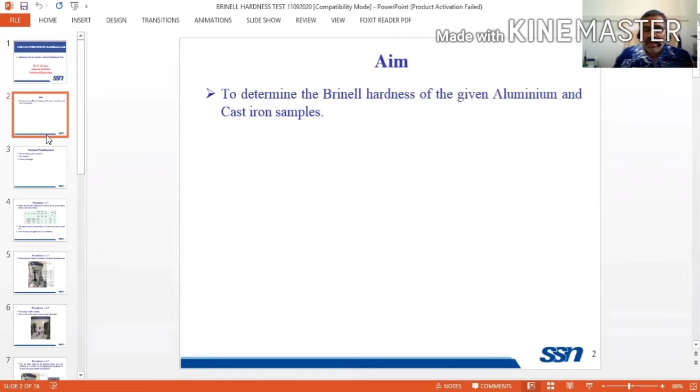This is a Brinell hardness test. The aim of this experiment is to determine the Brinell hardness number of given aluminum and cast iron samples. Tools required are Brinell hardness testing machine, ball indenter, and Brinell microscope.

So procedure, there are 7 steps in the procedure. The first step is we have to fix the load and duration of application of the load. Here 4 different metals are given. The first metal we are going to use is ferrous. For ferrous, the corresponding load is 3000 kg and the time of load is 15 seconds.

Again, we are going to use aluminum. For aluminum the load is 1000 kg and the time is 15 seconds. So for steel we use 3000 kg, 15 seconds, and aluminum 1000 kg and 15 seconds. This is a standard value. Next,

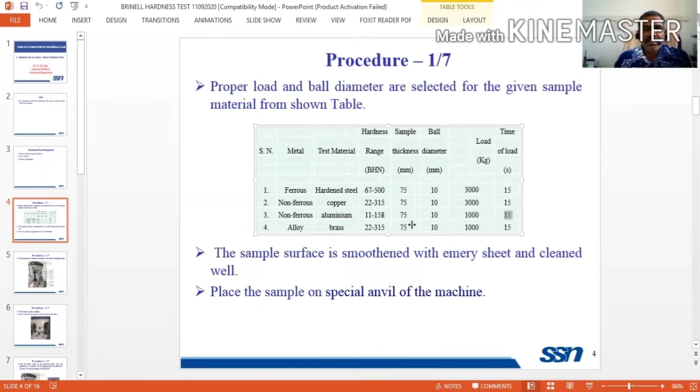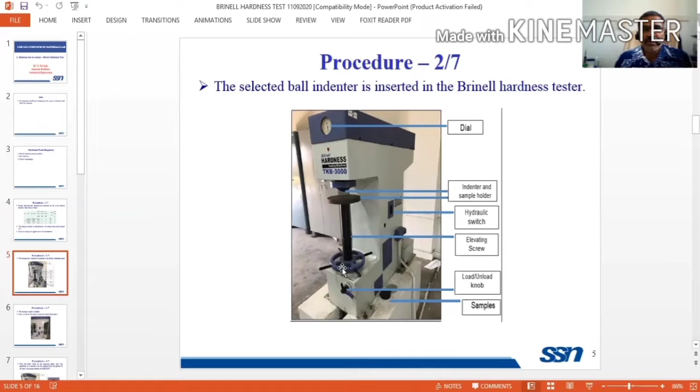Here we have the loading unloading knob. When you rotate it clockwise, the load will be applied on the workpiece by the indenter, and if you unload it, it will be removed. Next, you have to select the weight. Already I told you how much weight is to be applied. This is where you apply the load. For aluminum you apply 1000 kg, and for steel 3000 kg. After that you press this button, then load will be applied. It's a hydraulic system.

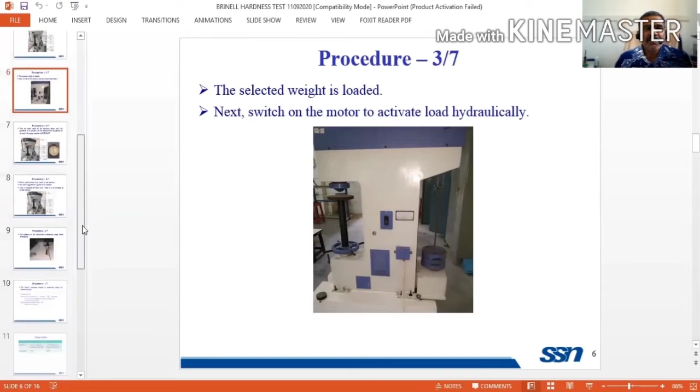Here is where we fix the workpiece. By rotating the wheel, the screw moves upward, and the workpiece comes in contact with the indenter. Once the indenter has initial contact, see, there is a big dial, inside there is a small dial, and an indicator. When the initial setting is over, that can be confirmed by the indicator reaching the red spot. Then the initial setting is over.

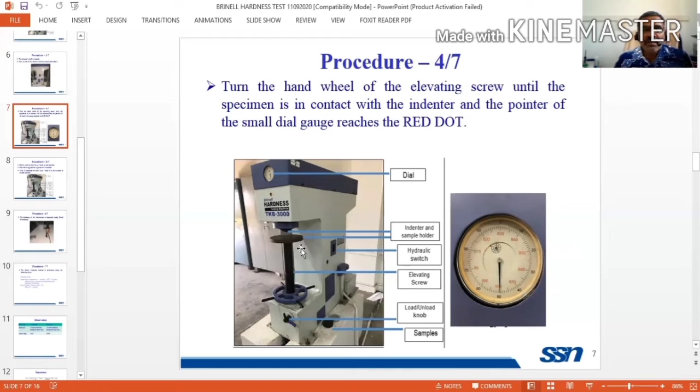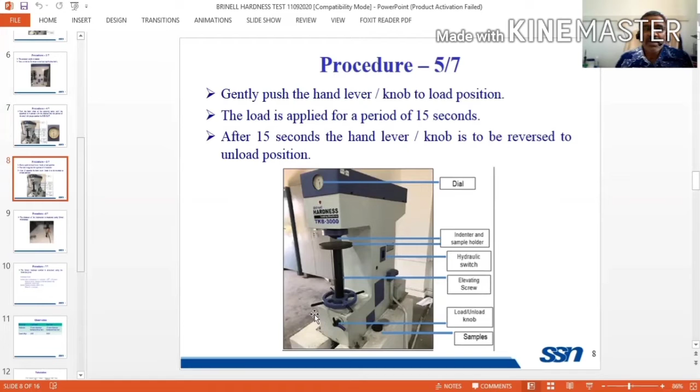After that, we have to apply the load. This is the loading knob. Rotate it clockwise, load will be applied, and wait for 15 seconds. After 15 seconds, remove the load. After the load is removed, take the workpiece to the Brinell microscope. Its purpose is to measure the diameter of the indentation. We already know the diameter of the indenter, it is 10 mm. Now you find the diameter of the indentation using this microscope.

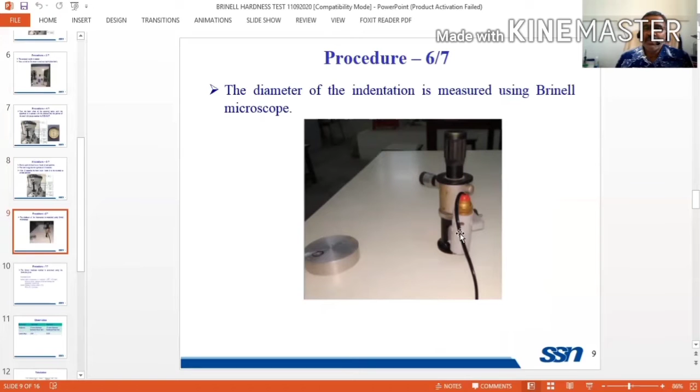After that, you have to do the calculation. This is the area of indentation, which can be calculated using this equation. Here, capital D is the diameter of the indenter, 10 millimeters. Small d is the diameter of the indentation, which you measure from the microscope. Substitute all the values in millimeters. Similarly, substitute the load in kg.

So Brinell hardness number is load divided by area. Area in millimeters, load in kg. It will give you a number. It doesn't have any unit. It is the Brinell hardness number, which gives the indication of hardness.

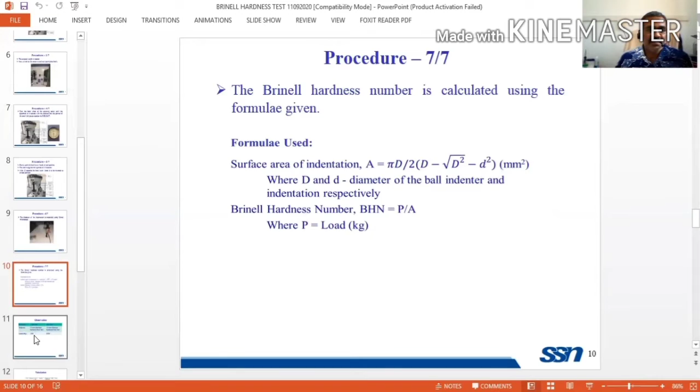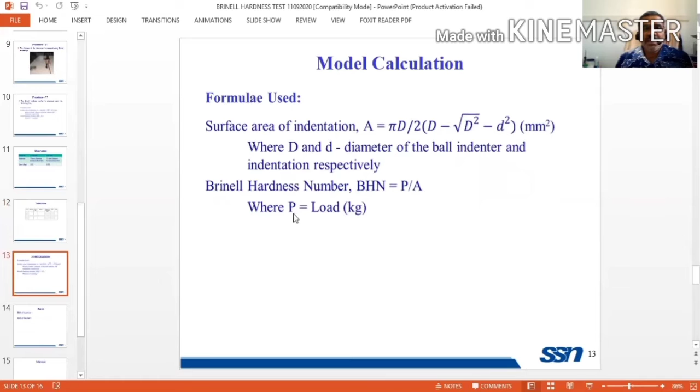You enter the diameter, then you enter the hardness value, which you get from the calculation. Then you have to write the mean. We have taken only one reading, so you write that reading. So this is the equation for calculation.

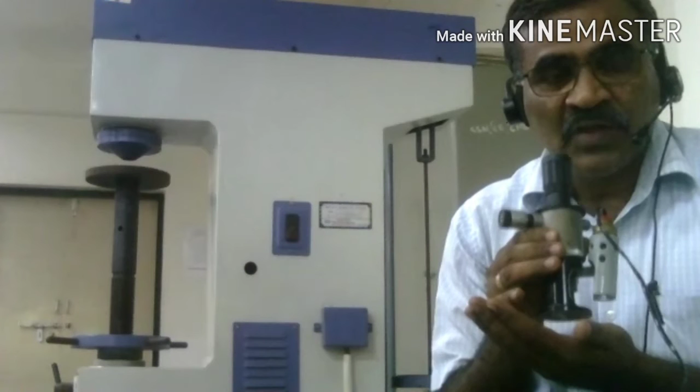We have a microscope, a small microscope. This is used to find the diameter of the indentation. You keep the workpiece here, and you can view from the top, and that will give the dimension of the indentation. So now we have the dimension of the indentation and the dimension of the indenter. By using these two, you will be able to find the hardness. So this is the procedure.

The procedure is almost similar to the Rockwell hardness. But in the Rockwell hardness, the reading is directly given, but here we are measuring the diameters, and using the diameter we calculate the hardness. That is the only difference. The value may be different; it has another scale. So if you want to compare the hardness of different materials, you have to use the same scale. Rockwell and Brinell cannot be compared. If you want to compare, take the Brinell hardness for all materials. Now let us see how to do the experiment.

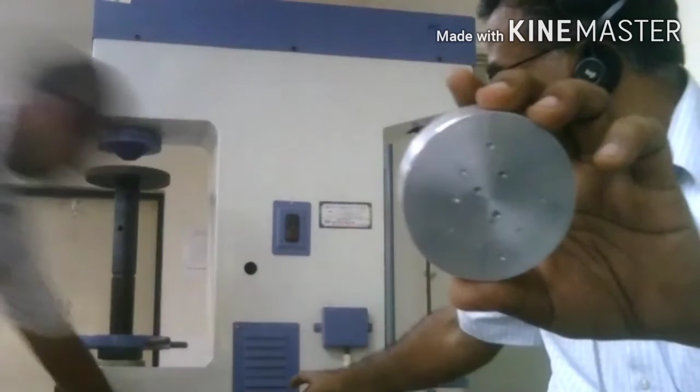So as we saw earlier, this is the aluminum piece, and this is a steel piece. Now we are going to conduct the experiment on the aluminum piece as well as the steel piece. First aluminum. Here the loading conditions are different. We are going to use the same indenter for the two different materials, and the loading condition is different.

For aluminum, we are going to use 1000 kg. Here you have to apply the load. In case of steel, we are going to apply 3000 kg. In the previous case, it was 100 and 150, but the indenters were different. Here, same indenter, but the loading condition is different. For aluminum, it is 1000. For steel, it is 3000. So you have to follow the procedure.

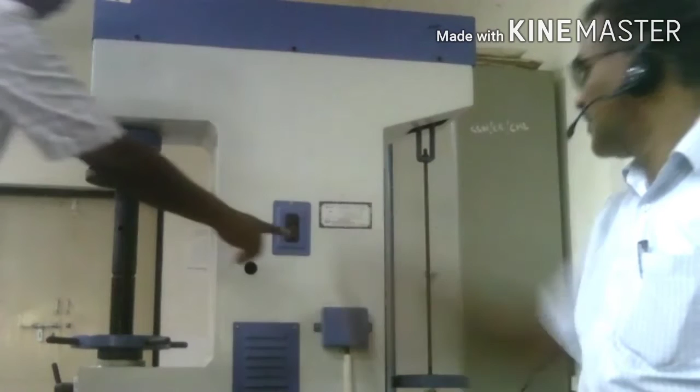Now here, sorry, 500 kg is already there. Now 250 kg we are going to put. This is 250 kg. So now 500 plus 250, it is 750. One more 250 kg. So now totally 1000 kg. This is for aluminum.

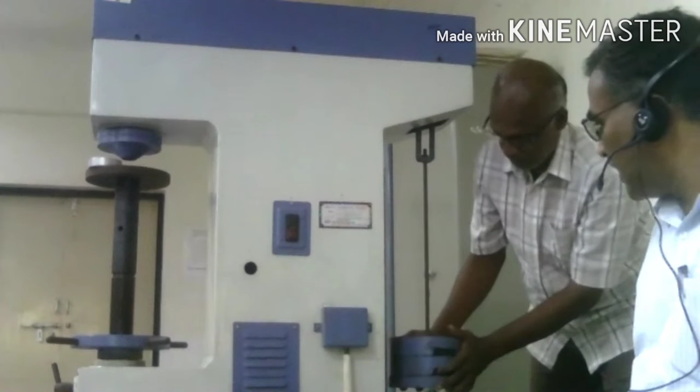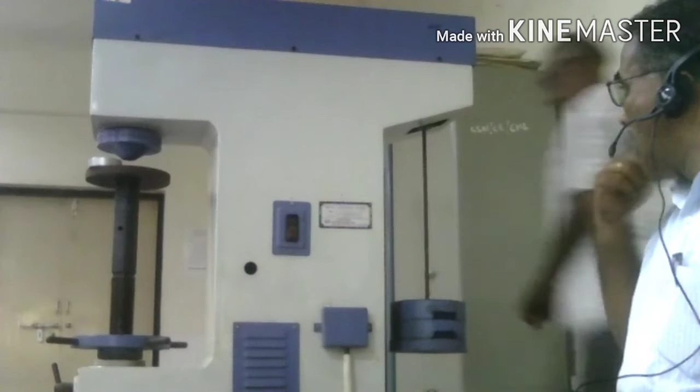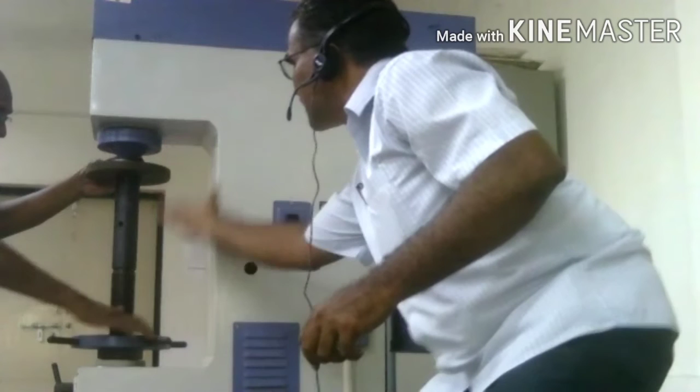This is operated by hydraulics, so you have to switch on the hydraulic mode. Now the hydraulic is on. Now he is fixing the specimen. As you rotate the wheel, the specimen goes upward. He is selecting a place where there is no indentation.

Now it is just touching it. You have to give the minor load; that is the initial setting. When he rotates the wheel, slowly it will go up. At the same time there is a dial. The dial has to show 0. Till then you rotate it.

Is it okay? Okay. Now it is 0. So he was rotating the wheel. If you rotate the wheel, the workpiece is going against the indenter. A minor load is acting. At that position, the indicator is showing 0. So initial setting is over now. Minor load is applied.

Now we have to apply the load. In the previous case, in the Rockwell hardness test, we applied the load slowly. There is no time. But here there is a time setting. Load has to be applied only 15 seconds. You switch on the timer, apply the load, and exactly at 15 seconds you stop it. You unload it.

Now he is going to apply the load. Now he is applying the load, and is seeing the time. 1, 2, 3, 4, 5, 6, 7, 8, 9, 10, 11, 12, 13, 14, 15. Time is over. Now it is unloaded. Now you can release. Now the experiment is over.

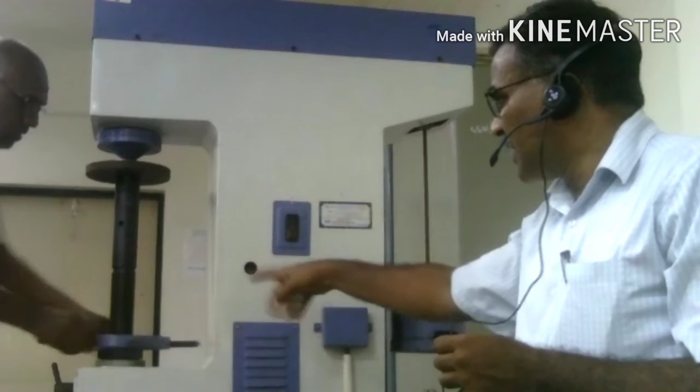Now he is releasing it, rotating the wheel in the opposite direction. The specimen is coming down. Now he is taking the specimen. Now you can see this is an indentation. There's a circle. Inside the circle, the indentation is formed. Now, what you have to do? In the microscope, you have to find the diameter. So this is a microscope. You keep the microscope on the workpiece and find the dimension.

Now sir will measure the dimension and tell. Now he is finding the diameter of the indentation, 3.6 millimeter. The diameter of the indentation is 3.6 millimeter. That can be measured using a small microscope. Already we know the diameter of the indenter is 10 millimeter. The 10 mm indenter is used to produce indentation. The 15-second time was given for loading.

So using these two diameters, you will be able to find the hardness: diameter of the indentation and diameter of the indenter. That will give the hardness. There is an equation. You can refer to it.

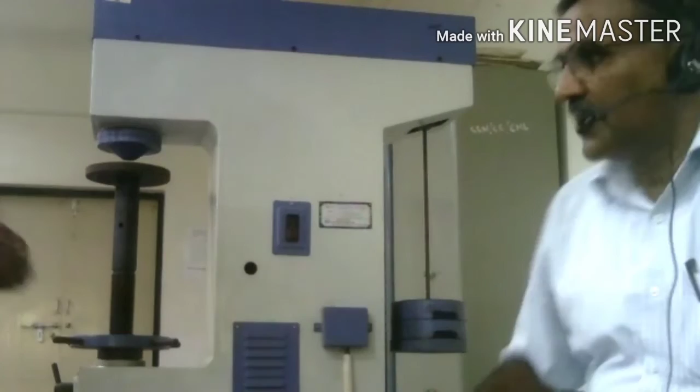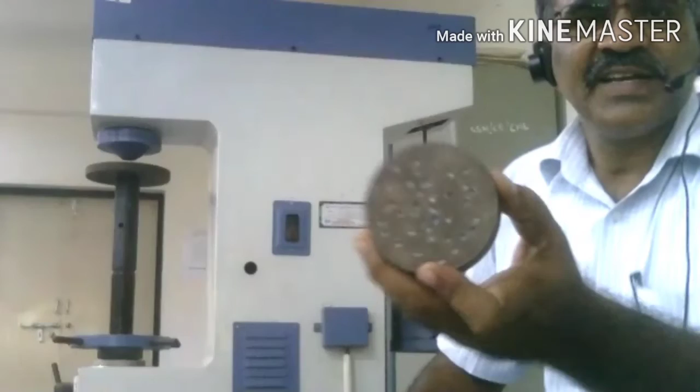Now we are going to test the cast iron specimen. You already have seen the cast iron specimen. Lot of indentations are there. You have to select another place where indentation is not there. So now he's going to apply the load. Already how much load is applied? 1000 kg is there.

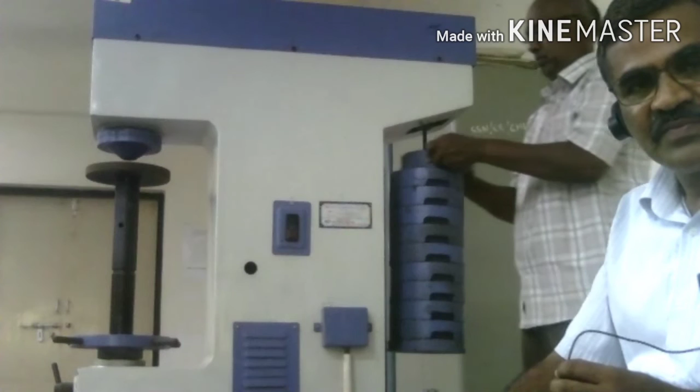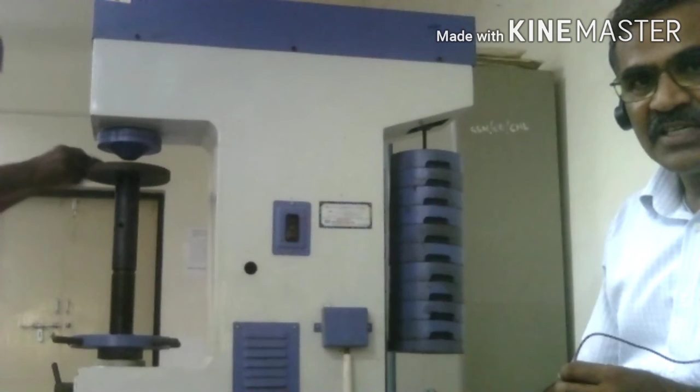Now 2500 kg, 2750, and finally 3000 kg. Now 3000 kg is applied. Already it is in on position. Now he has taken the cast iron specimen. He is fixing the cast iron specimen.

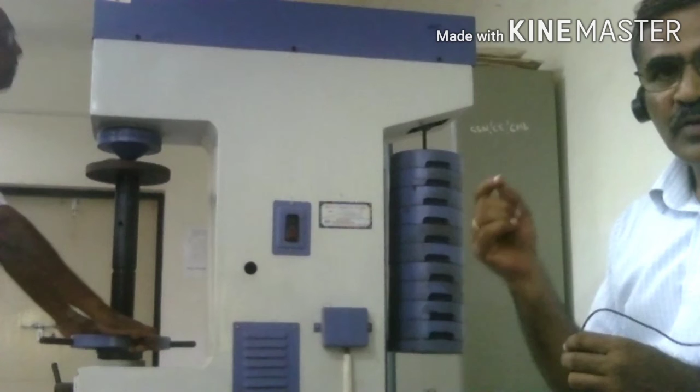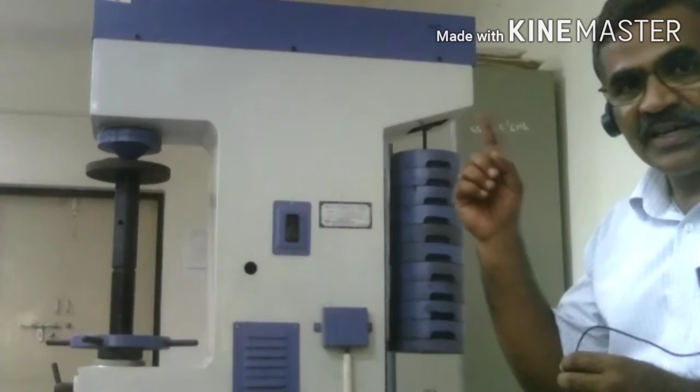Now he is rotating the wheel. You keep the specimen and rotate the wheel. Now it is in contact with the indenter. After having contact with the indenter, again you rotate for some time till the reading is showing 0. Now the reading is also 0. So minor load is given. Initial setting is over. Now we have to apply the load. How many seconds? You have to apply the load 15 seconds.

Now he is applying the load. He is waiting for 1, 2, 3, 4, 5, 6, 7, 8, 9, 10, 11, 12, 13, 14, 15. 15 seconds is over. Now he stopped the loading. Now you rotate the wheel. The specimen is coming down. You take the specimen and mark the indentation.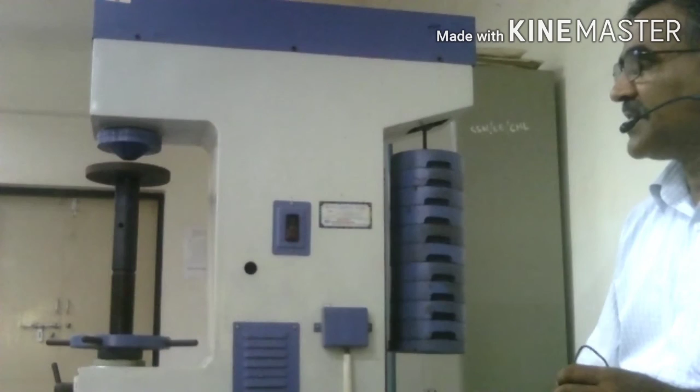Now you can see the indentation. Now it is marked in red color. Able to see? It is in red color. Now what is the next step? Next step is measuring the diameter of indentation by microscope. By using the microscope, the diameter is measured. That is measuring.

It is 4 mm. Diameter is 4 mm. Now, already we know the diameter of the indenter. What is the diameter? 10 millimeters. Now the indentation is 4 millimeter. Using the relation, you will be able to find the hardness. In the equation, you substitute the values and find the hardness. So this is the way you have to do the experiments. But you have to take 3 readings. You take the average value. Okay.